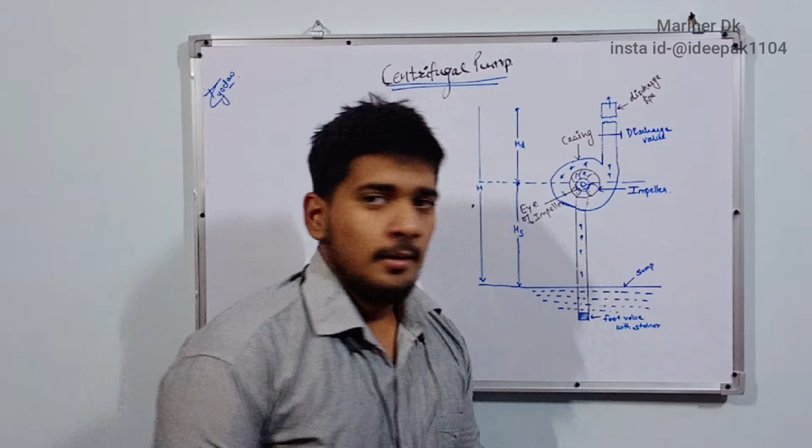So what is a pump? Pump is a hydraulic machine which is used to convert mechanical energy into hydraulic energy. The hydraulic energy is converted in the form of pressure energy.

When this is done with the help of centrifugal force or effect, then it is called a centrifugal pump. So the conversion of mechanical energy into pressure energy with the help of centrifugal force is called centrifugal pump. Let us talk about this diagram first of all.

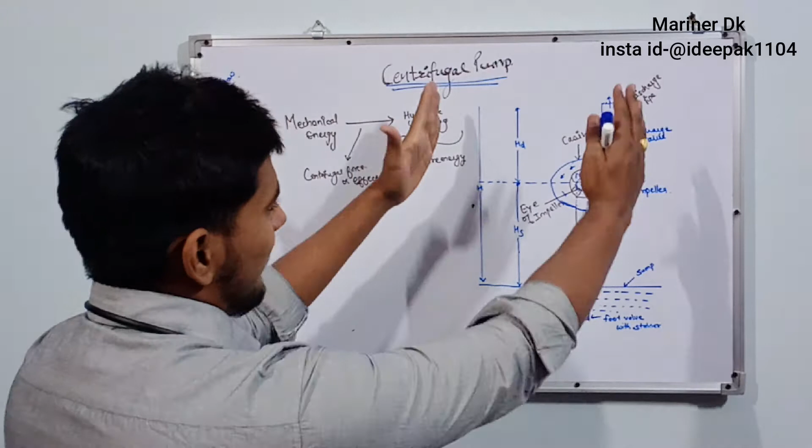We have the sump where the liquid is stored or liquid is there to be pumped. Then we have the foot valve with strainer. Foot valve is a non-return valve which is only open in the upward direction.

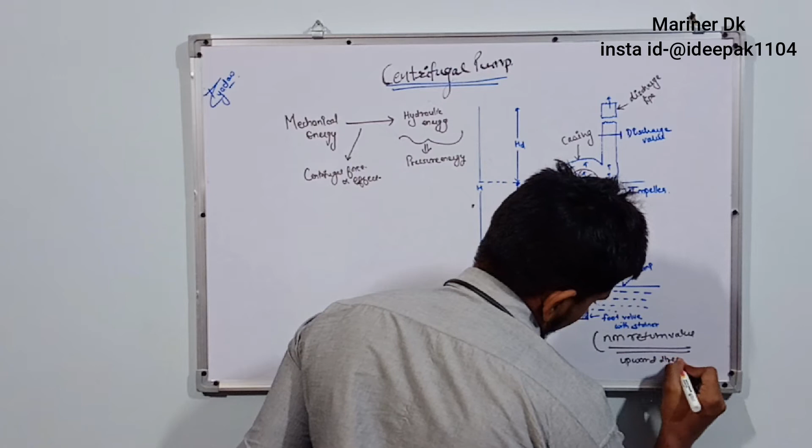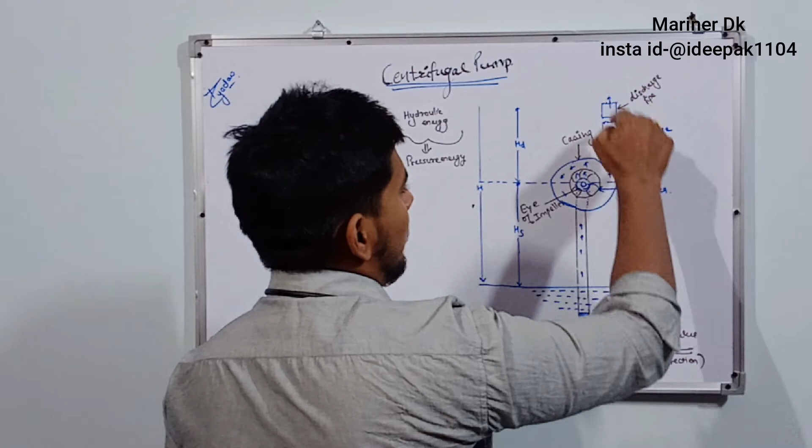Strainer is like a filter which filters the small or large particles which create an effect on the impeller. This is the suction pipe, this is the discharge pipe, this is the discharge valve, this outer portion is known as casing, this rotating part is impeller, and the center of the impeller is known as the eye of impeller.

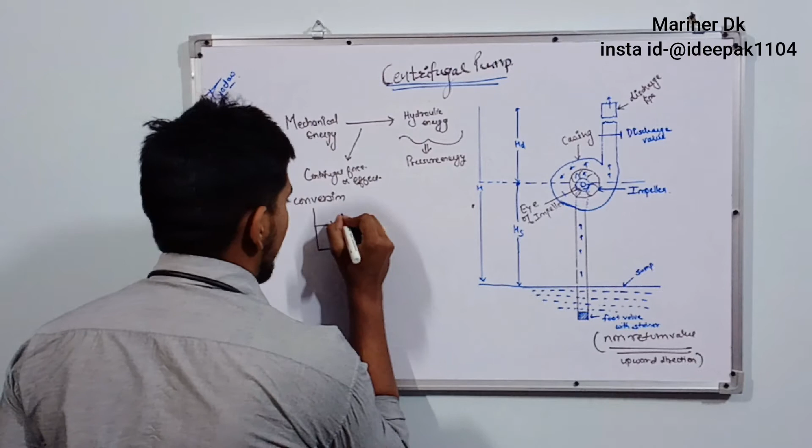So let me explain you now. First of all, the main thing is energy conversion. Two components are responsible for the energy conversion. In the centrifugal pump, there are only two components responsible for the conversion of energy: first is impeller, and second is casing. I will explain you how.

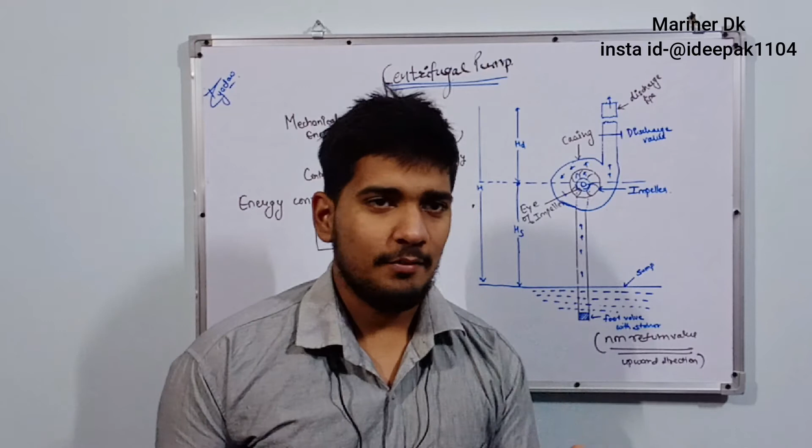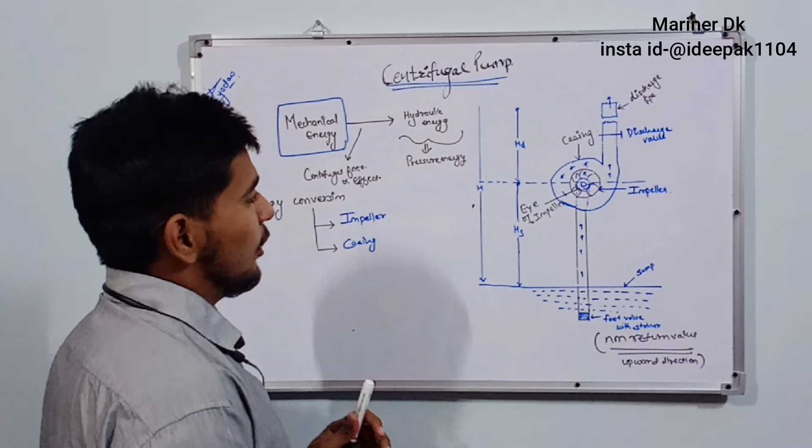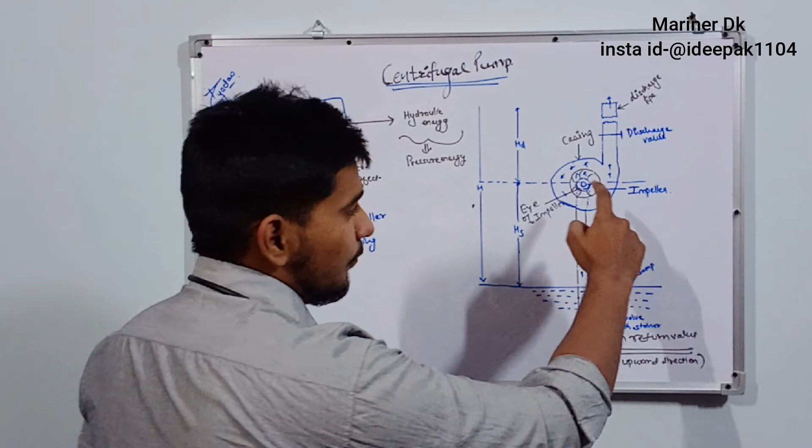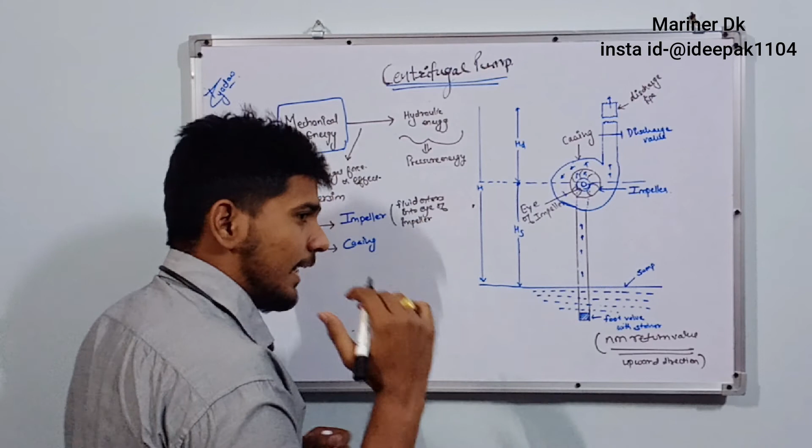As the impeller starts rotating, we create a negative pressure region. When we have low pressure than atmospheric, we will be able to suck the fluid into the impeller. So the impeller is responsible as the fluid enters into the eye of impeller, enters axially and flows radially outward.

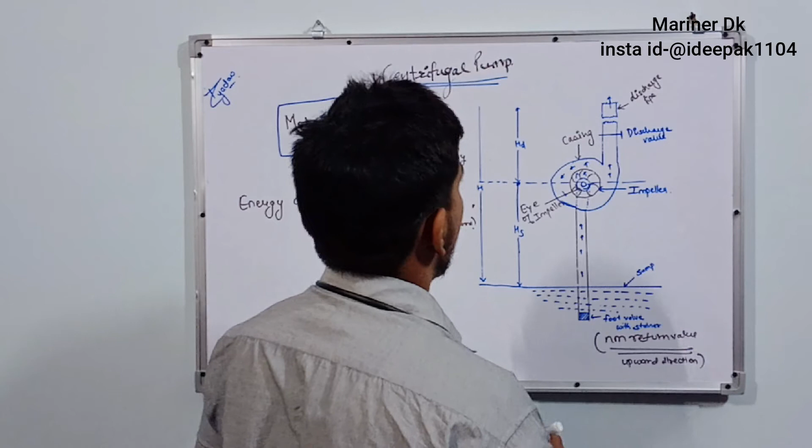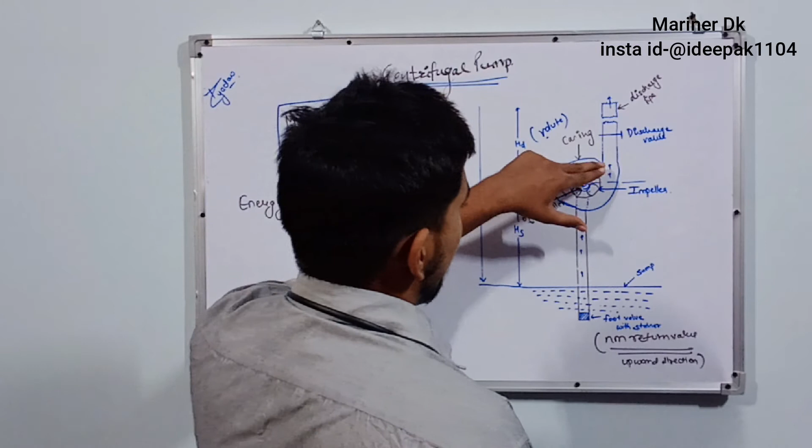As it flows radially outward, it impacts on the casing. The casing being used here is the volute casing, in which the area is increasing gradually, as you can see in this portion.

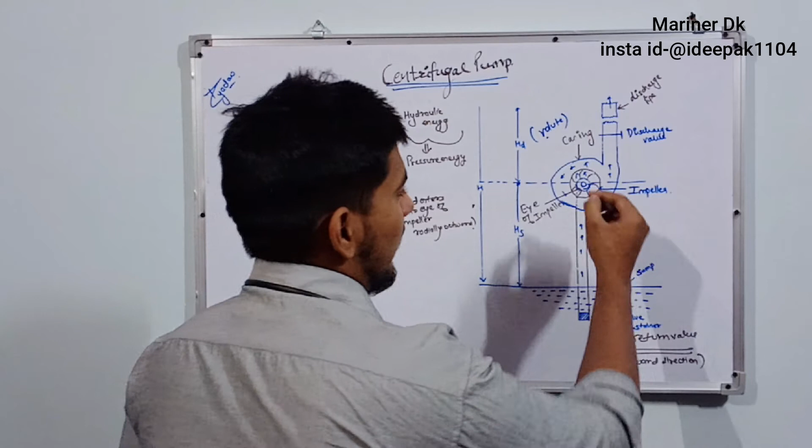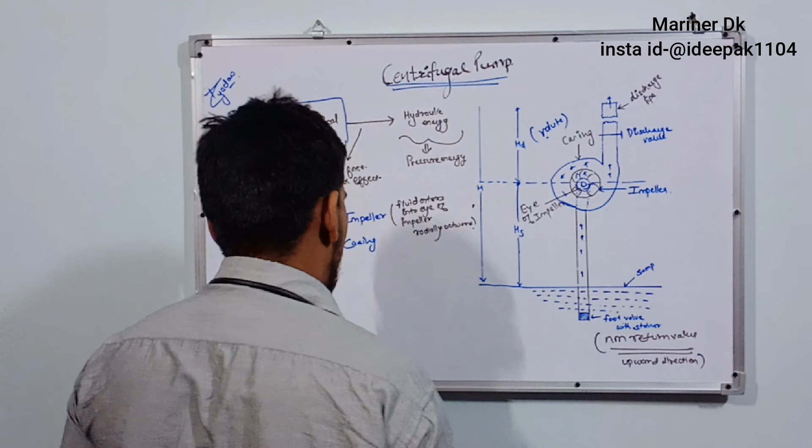So as the fluid enters into the impeller axially and flows radially outward, as the fluid comes to the volute casing, the area gradually increases. As the area increases, velocity decreases. So as velocity decreases, we gain pressure energy, and as we gain pressure energy, we can discharge the fluid up to the required height or region.

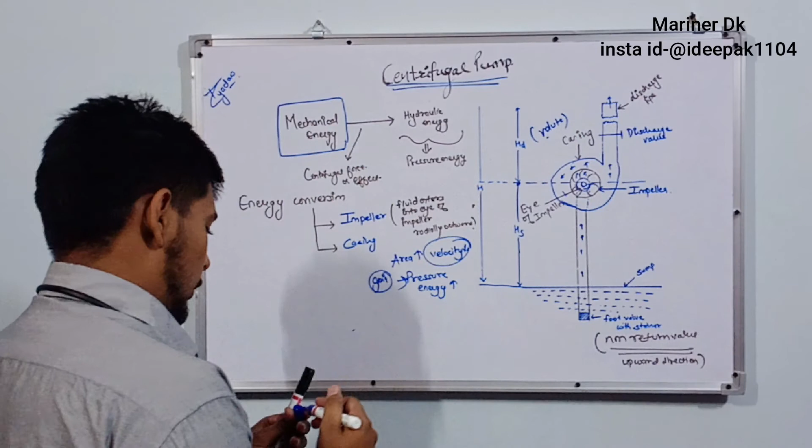So the fluid goes into the discharge area. This was the basic working of the centrifugal pump. You can note it down if you want to. This is the diagram.

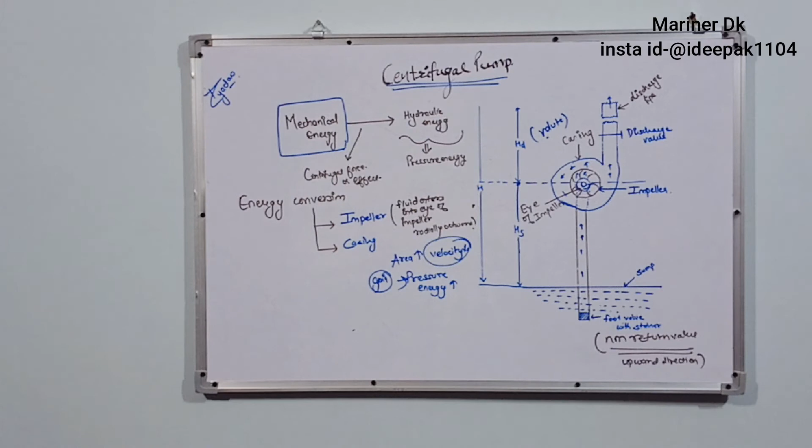Now the point arises, what are the questions put up by the interviewer in this portion? The first question can be the working of centrifugal pump.

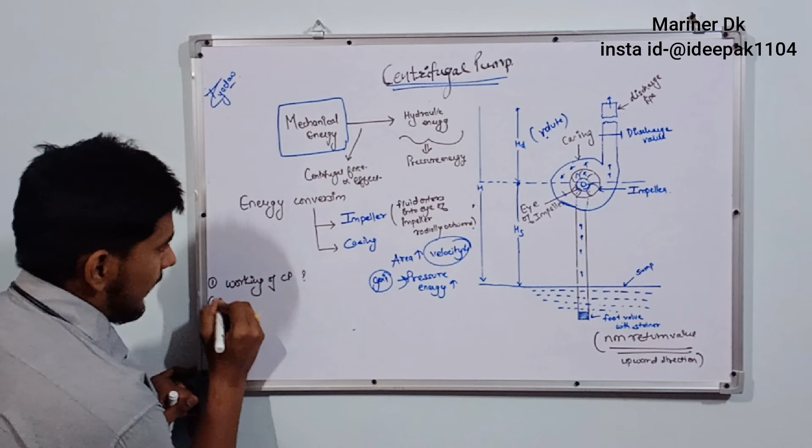Second can be which part is responsible for energy conversion. So you can mention these two parts as these are important for the energy conversion.

The third question that can be asked by the interviewer is define the parts of centrifugal pump, or you can say mention the parts of centrifugal pump. As this question arises, you have to mention the parts of centrifugal pump.

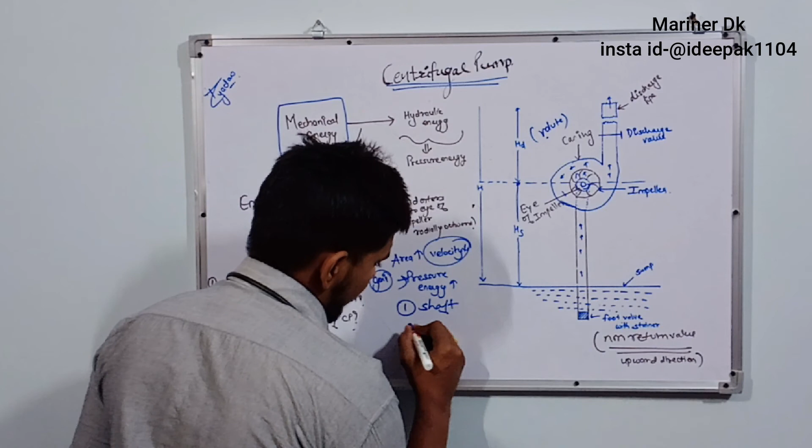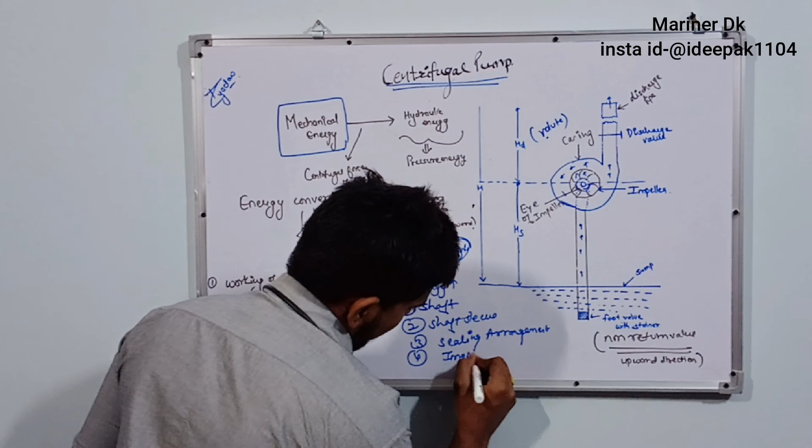So you have to mention the parts like shaft, shaft sleeve, third can be sealing arrangement, fourth impeller, fifth can be casing. So these are the parts of centrifugal pump.

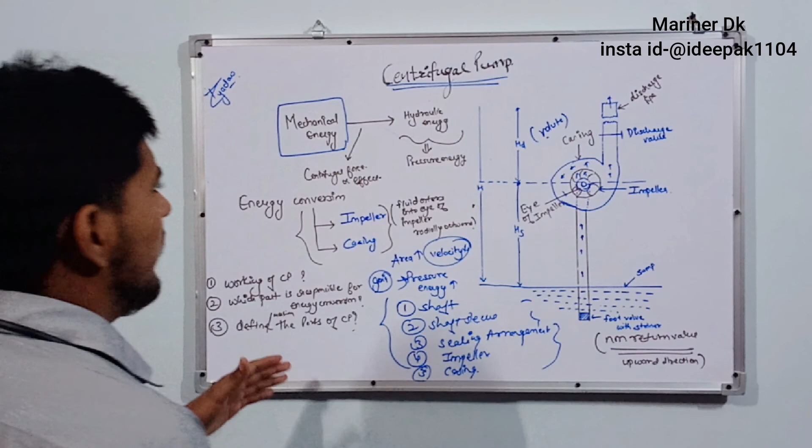So these are the only questions that can arise from this area. So I have covered the portion of centrifugal pump.